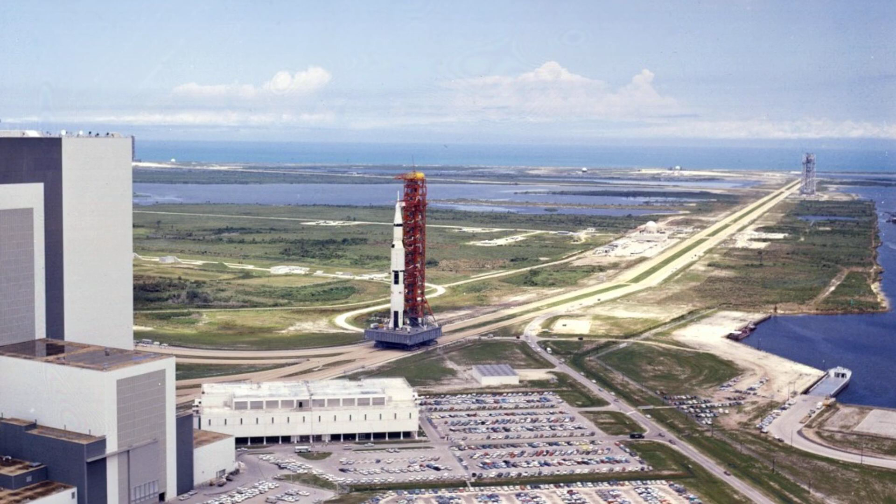More than half a century ago, we built the most powerful machine human beings have ever operated. It stood taller than a great cathedral. It burned fuel by the ton every single second. And it did something no machine had ever done before or has ever done since. It carried people all the way to another world and brought them safely home again.

And here is the part that should stop you cold. We cannot build it again. Not because we lost the drawings, as the popular story claims. The truth is stranger and far more unsettling than that. We still have the plans. We simply no longer have the ability to follow them.

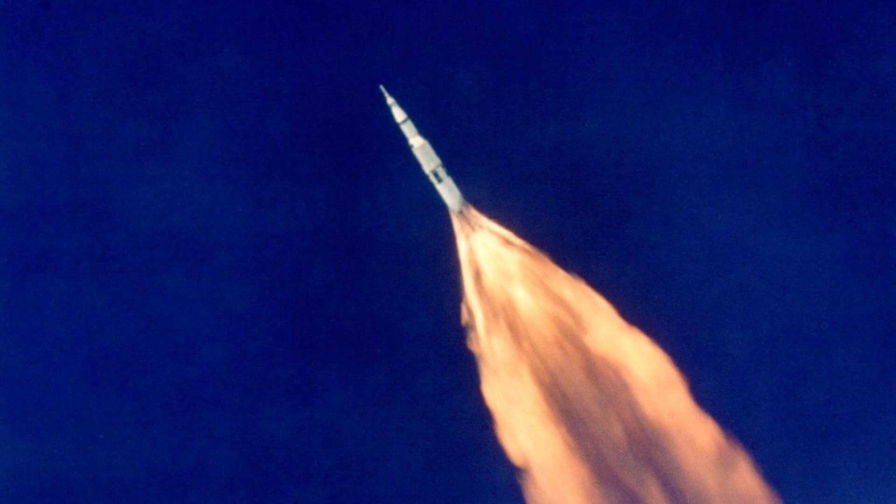This is the story of the mightiest machine ever made, and how a nation forgot how to build its own greatest creation, built by people who believed it could be done.

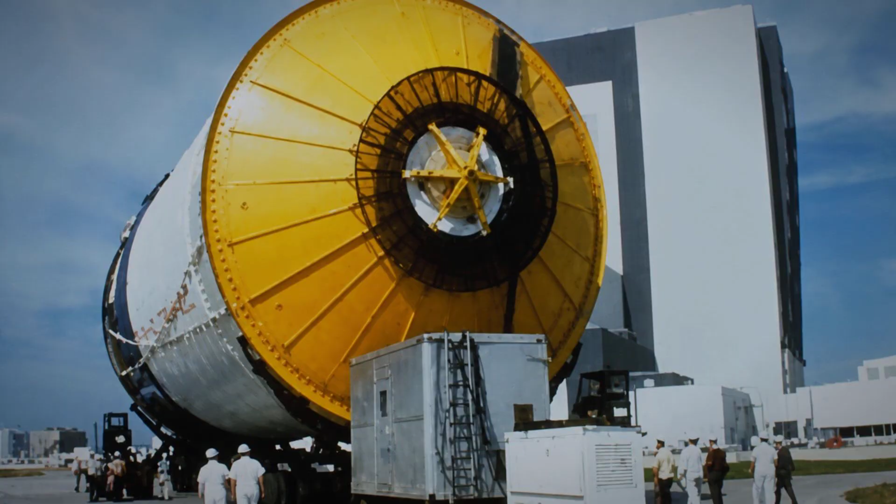To understand what was achieved, you have to grasp the sheer scale of the thing, because numbers barely do it justice. This machine stood taller than the Statue of Liberty. Fully loaded, it weighed more than 6 million pounds, most of that simply fuel. At the moment it left the ground, its engines produced around 7.5 million pounds of force, a raw power so violent that it shook buildings miles away and made the ground itself tremble.

A famous news anchor, watching from a supposedly safe distance, gripped his shaking booth and shouted that the roof was coming in. One of the early aviation pioneers was told that in its very first second of flight, this machine burned 10 times more fuel than his own historic ocean crossing had used from start to finish.

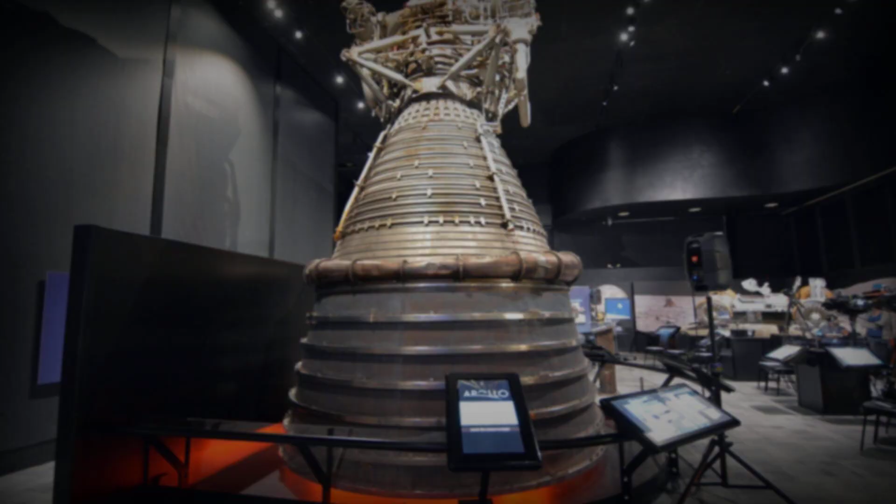At the heart of all this sat 5 enormous engines, and one of them alone remains to this day the most powerful engine of its kind ever successfully flown.

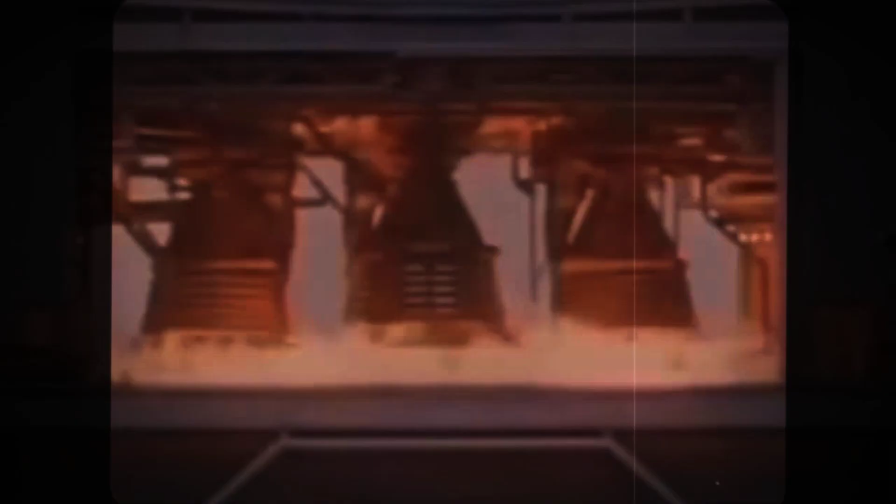But that raw power did not come easily. In the early days, the engineers could not tame it. On the test stands, these engines kept tearing themselves apart, hurling white-hot metal past the men who cowered behind concrete walls to watch. The problem was a violent, unpredictable shaking deep inside the engine, a thing so fierce it could destroy the machine in an instant.

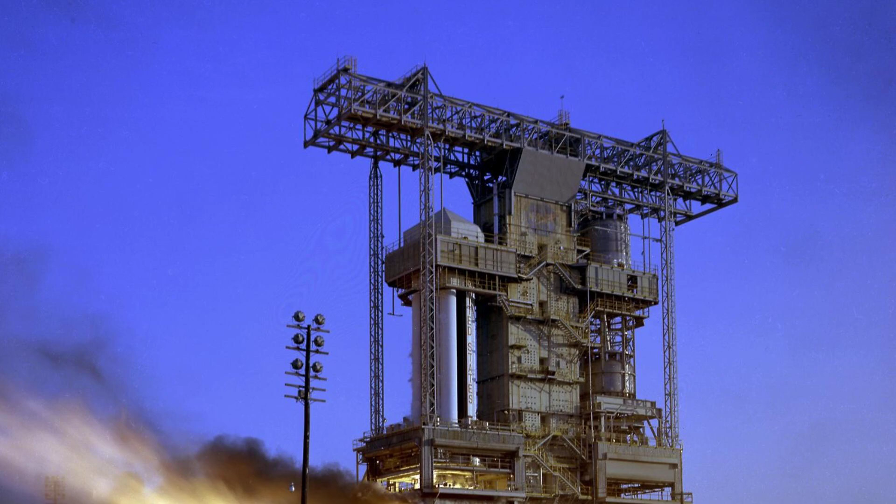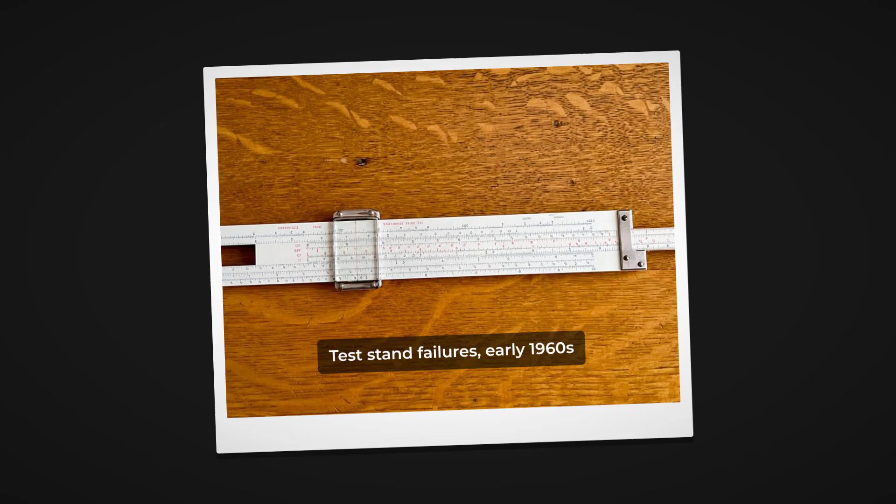And here is what people forget. There were no powerful computers to solve this. The men who tamed this beast did it with slide rules, with pencil and paper, and above all, by hand. They redesigned a single critical part again and again, testing tiny variations, learning by feel and failure what no equation could tell them, until at last they beat it into submission. Built by people who believed it could be done, armed with little more than patience and their own hands.

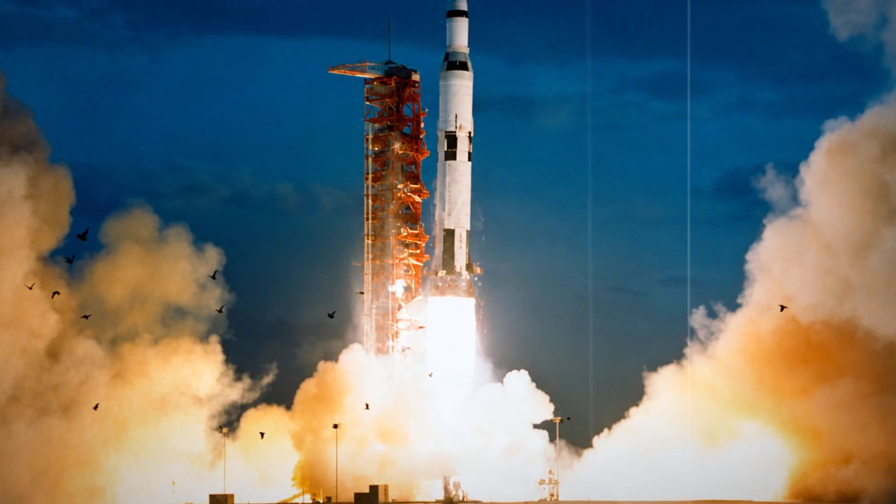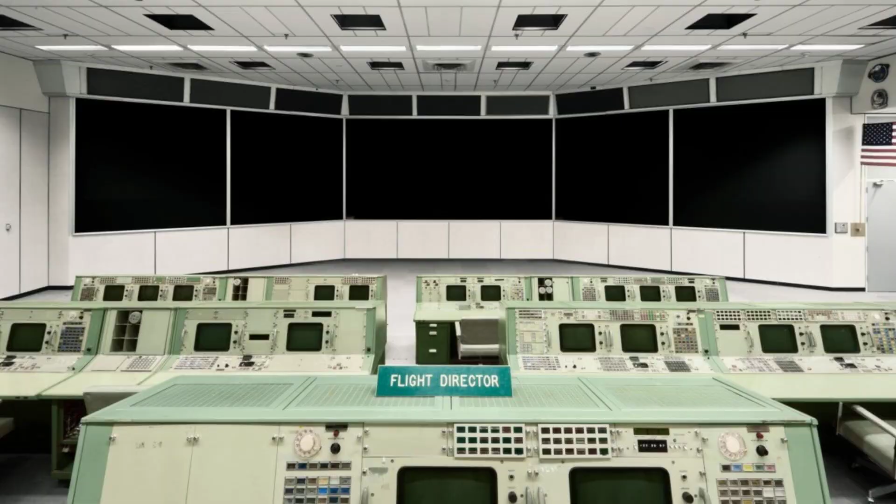Now, before this story goes on, hold a question in your mind. We tend to believe that progress only moves in one direction, that whatever humanity learns to do, we can always do again and better. But what you are about to learn challenges that idea completely. So ask yourself now, when we say we can no longer build this machine, does that mean we have genuinely forgotten how, that real knowledge has been lost? Or does it simply mean we chose to stop and could do it all again tomorrow if we truly wanted to? Forgotten or abandoned? Hold your answer, because the difference matters more than you think.

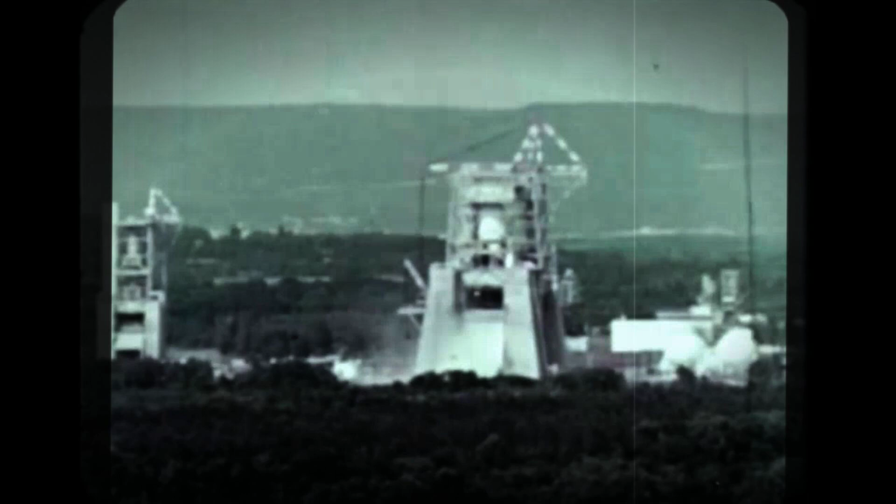For a few short years, this machine did the impossible over and over, without a single one of its great engines ever failing catastrophically in flight. It was, by any measure, one of the most successful and reliable machines ever built.

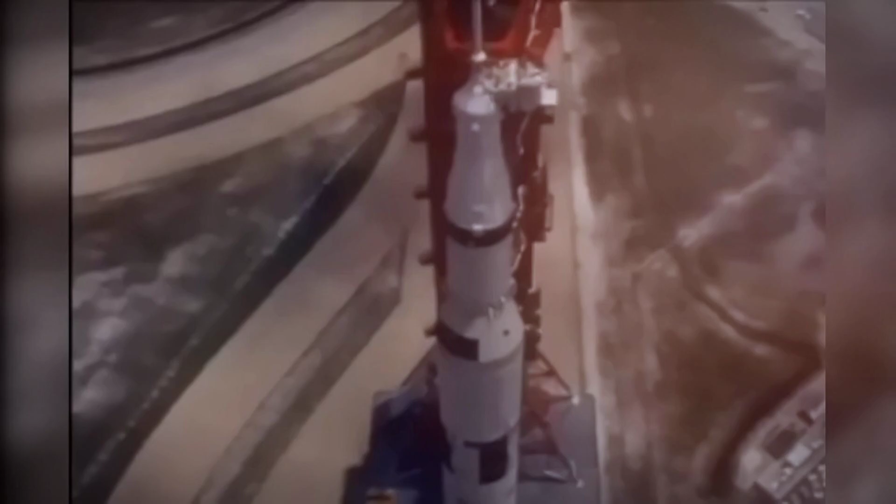And then, at the height of its triumph, with several of them already built and paid for, the program was simply shut down. The production line was closed. The reasons were tangled, but at the core it came down to cost, and a public whose attention had already begun to drift away from the moon. The most powerful machine ever made was retired not because it failed, but because we decided we no longer wished to pay for it.

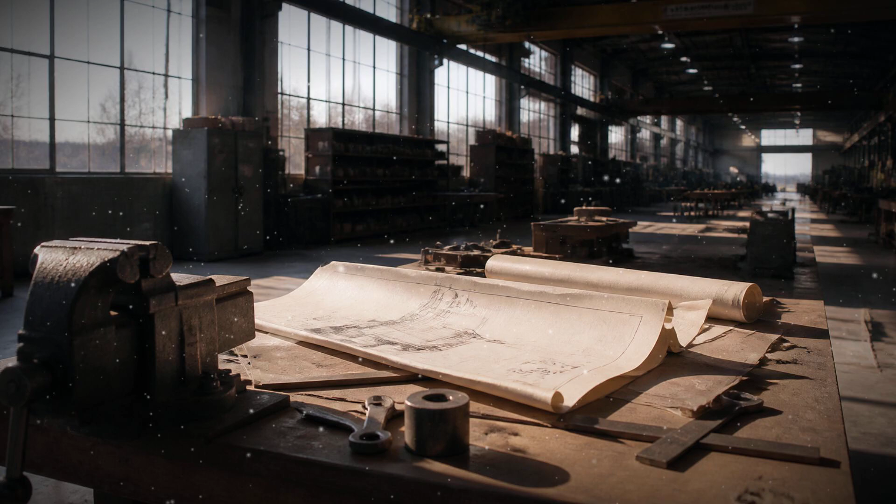Earlier, I asked whether we truly forgot or simply abandoned. Sit with it now, because the answer is uncomfortable, and it is both. Here is the thing the popular myth gets wrong. People love to say the drawings were lost or thrown away, and that is not true.

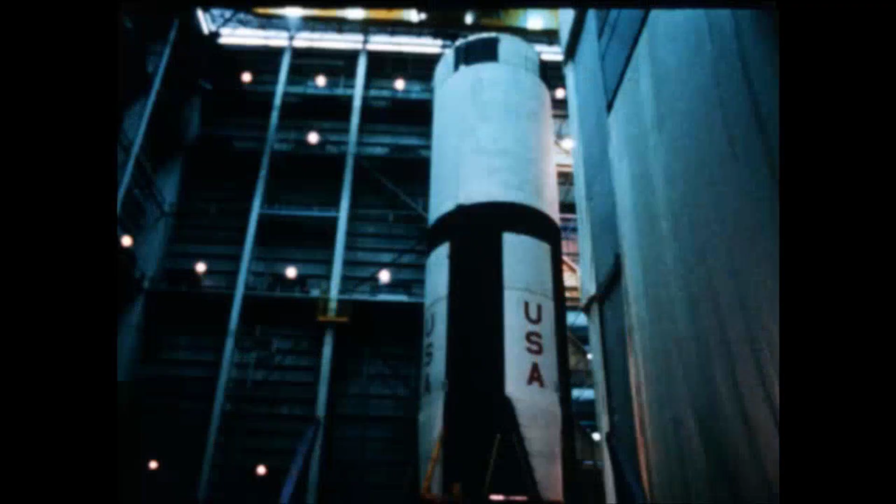The plans survive. But a great machine like this is not just its drawings. It was built by hundreds of thousands of people, and the deepest knowledge of how to actually make it, the feel of shaping certain metals, the tricks of hand-building thousands of delicate parts. The quiet skills that were never written down because they lived in the hands and habits of individual workers. All of that went home each night inside those people.

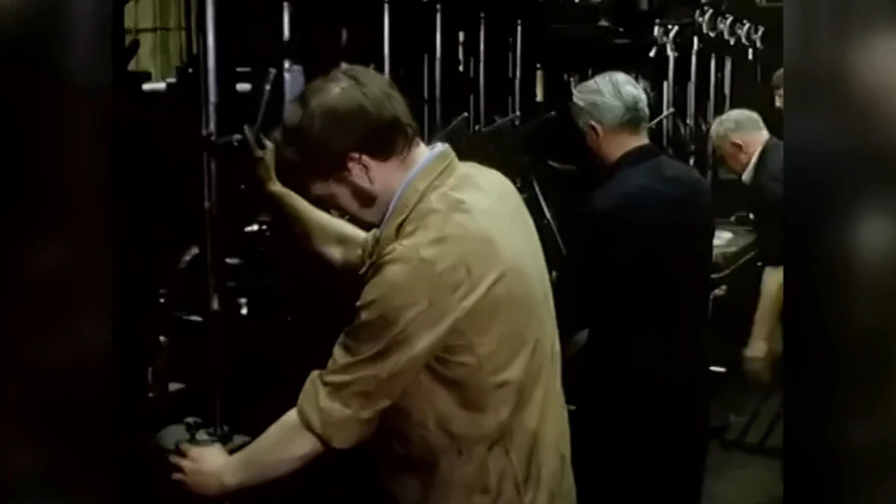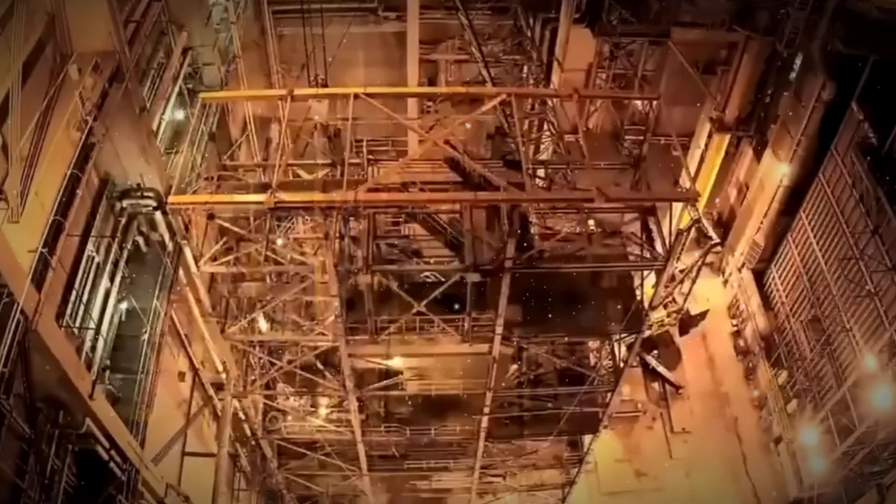And when the work stopped, those people scattered. They moved on, they grew old, they passed away, and they took that unwritten knowledge with them. The factories that made the specialized parts closed. The suppliers vanished. Tell me where you landed, forgotten or abandoned, because the honest answer is that abandoning it in the end is exactly how it became forgotten.

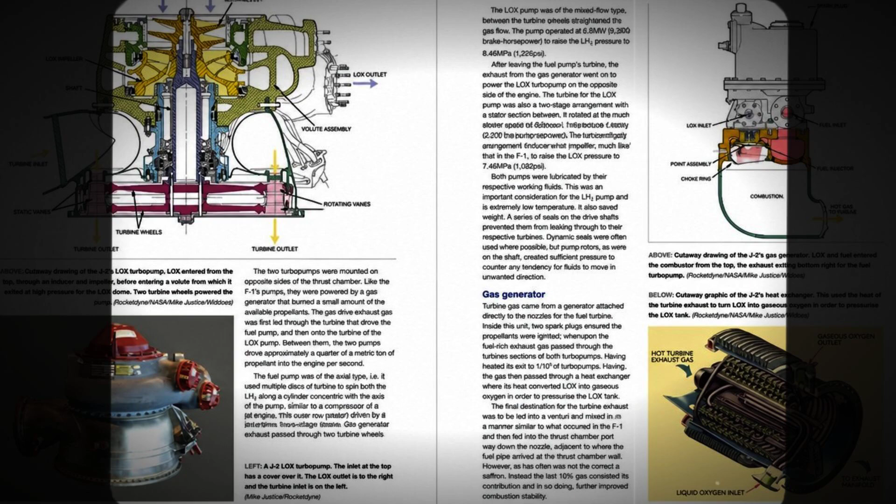There is a strange and haunting proof of all this. Years ago, engineers who wanted to understand these old engines again could not simply read the manuals and rebuild one. Instead, a team went to the bottom of the ocean where some of these engines had fallen away during launches decades before and hauled the corroded pieces up from thousands of feet down.

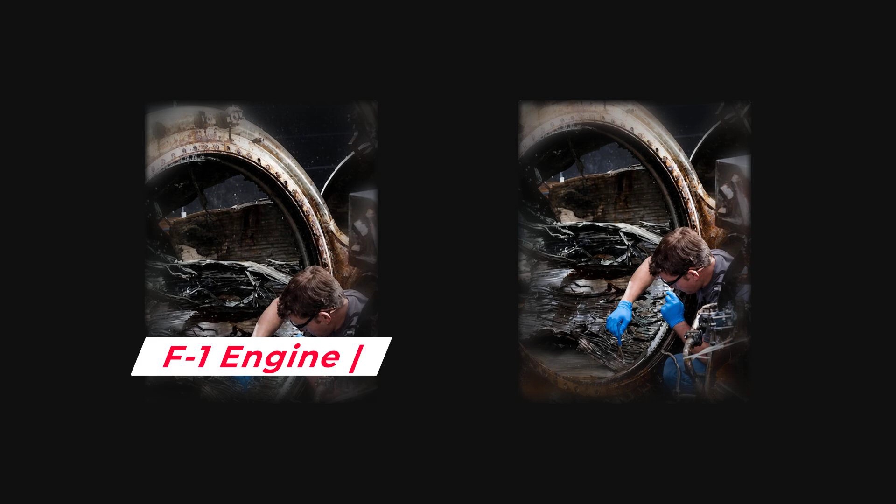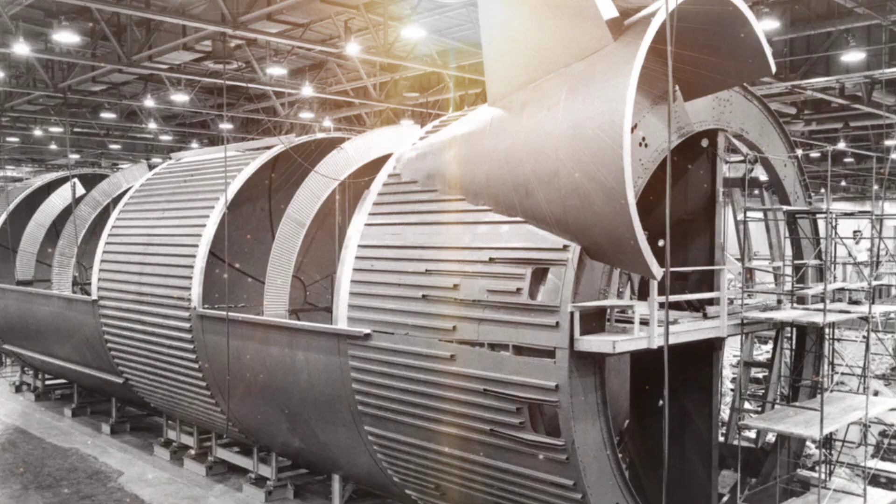They brought them into modern laboratories and studied them almost like archaeologists, examining the relics of a lost civilization, trying to reverse engineer the work of their own grandfathers. The people who built these machines had been so far ahead of their time that their descendants had to treat their work as an ancient mystery to be decoded.

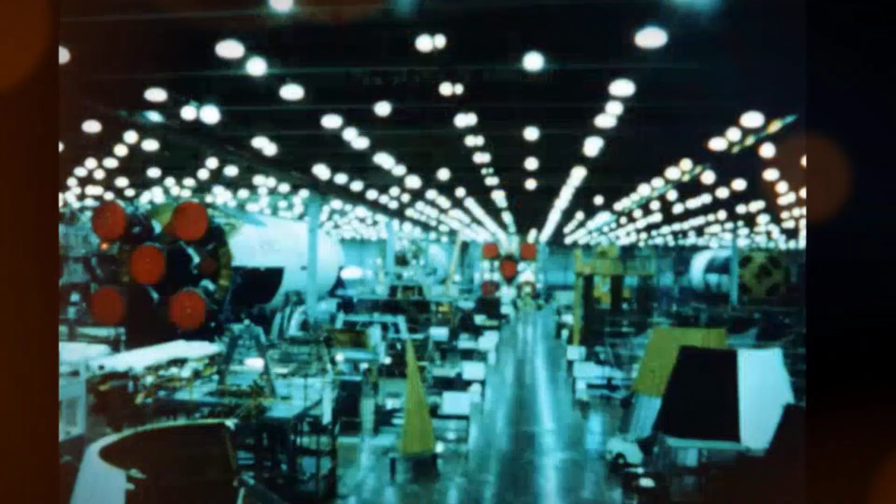If you have been weighing forgotten against abandoned this whole time, you already sense the truth. We did not lose a filing cabinet. We lost the living, breathing web of skill and industry that made the impossible routine, and we lost it not to disaster, but to choice.

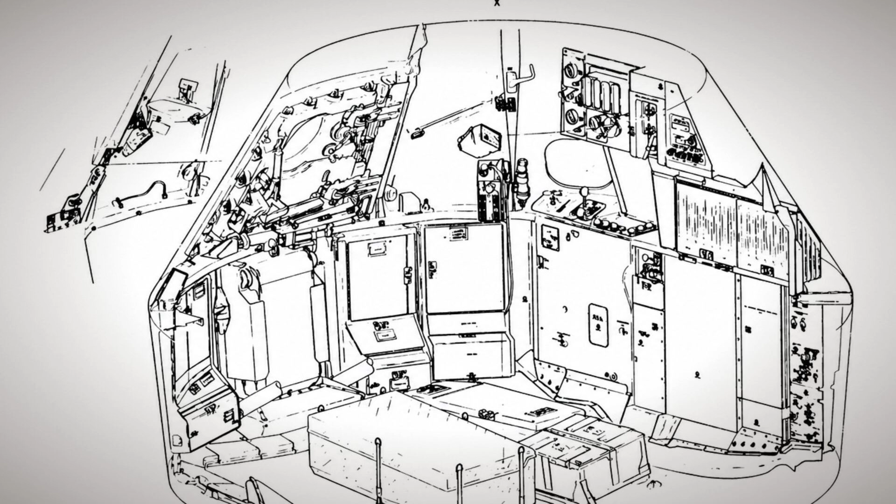What lingers about this story is bigger than one machine. It is a warning that runs through the history of everything we have ever built. Knowledge is not safe just because we once possessed it. It does not live only in drawings and books. It lives in people, in working hands and shared habits and unbroken tradition. And when we stop practicing a hard-won skill, it can quietly slip away from us, even at the very peak of our power.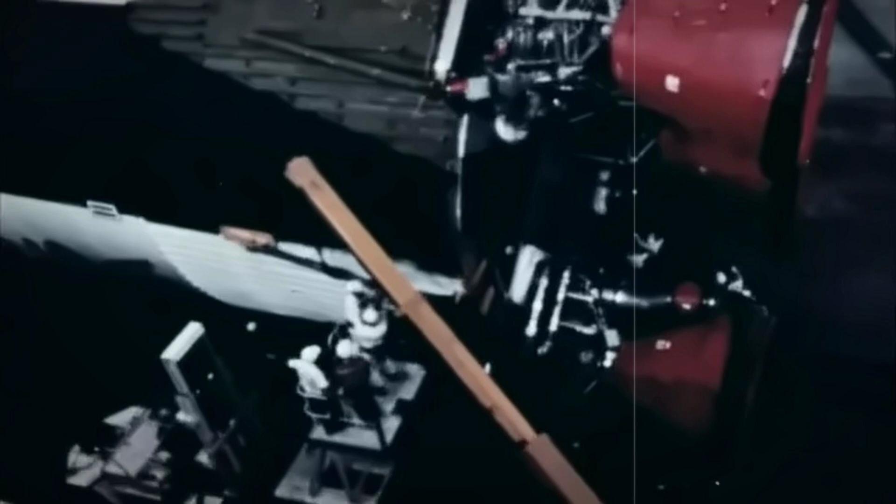We once built a machine that could carry us to another world. Then we set it down. And in setting it down, we forgot, piece by piece, how our own hands had done it. Whether we ever pick it up again is entirely a choice that still lies ahead of us. It was built by people who believed it could be done, and that's worth remembering.